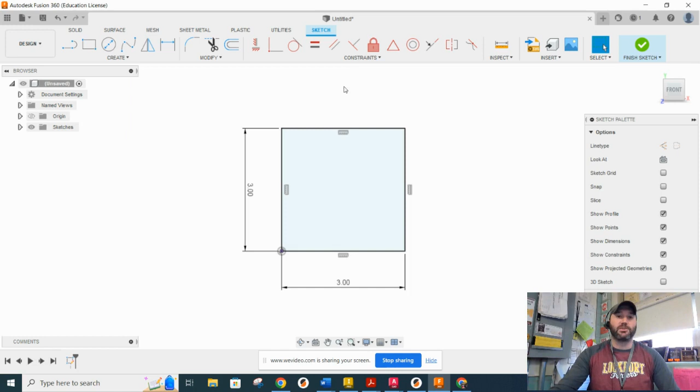I'm now going to use offset. We can see chain selection is on. I'm going to pull this down the thickness of our plywood, which is going to be 3/16 or 0.1875. Okay, we're good to go.

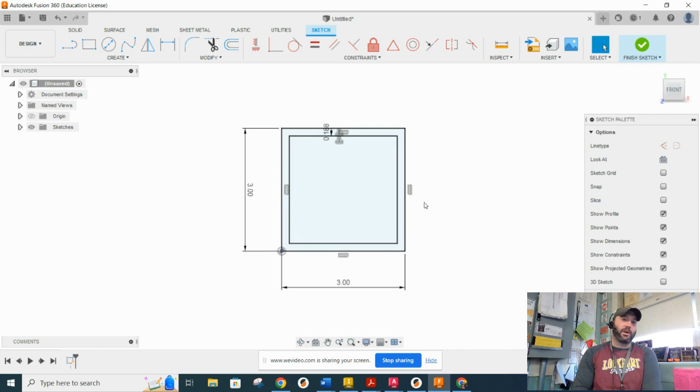Now we have to start figuring out our finger joints. These are simply wooden tabs. I'm going to say I'm going to have tabs here on each corner, and then I'm going to have tabs in the center. So if you think about it, we're going to have to divide this up into 5 different pieces in order to get those sections so I can extrude them.

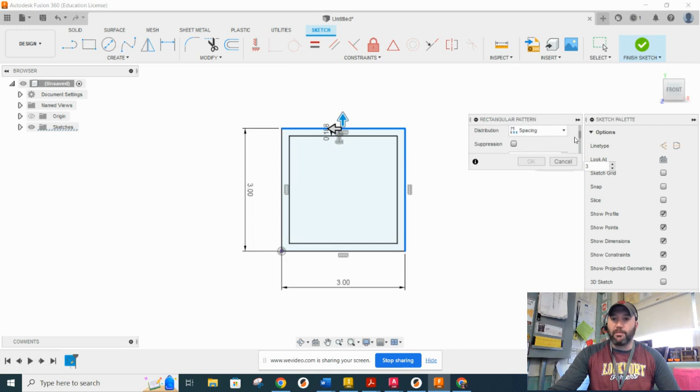I'm going to go to create, use rectangular pattern, and pick on my top line. Let's go ahead and do our directions first, and make sure that my distribution is set at spacing. I'm going to pull this down and say I want there to be 5 of these. If we took 3 inches divided by 5, that's going to be 0.6 each, and we can see that that has now been divided into 5 equal pieces. I'm going to say OK.

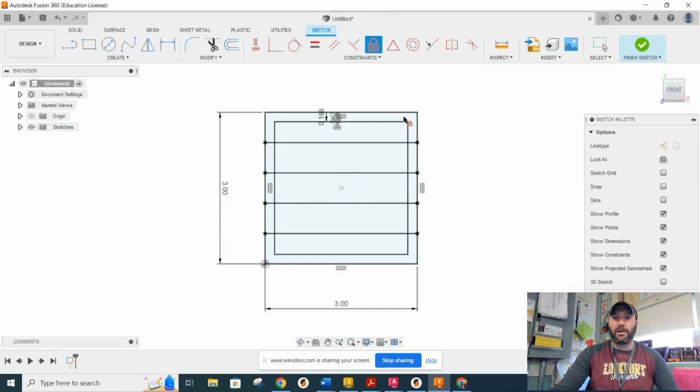Now I'm going to do the cheater method to go vertical with these as well. I'm going to go to point, and track this into place. I'm going to find that dead center, and then fix that point into position just like so.

I'm wanting to use these 4 lines right here. What I'm going to do is use circular pattern to grab those 4 lines, then select on my center point, and say that my quantity is going to be 4. Now we can see we have those vertical lines going up.

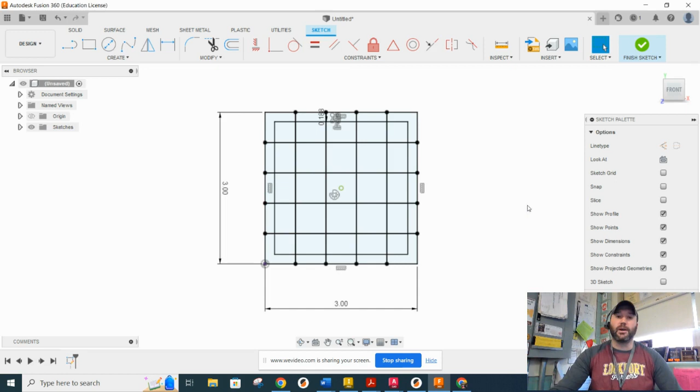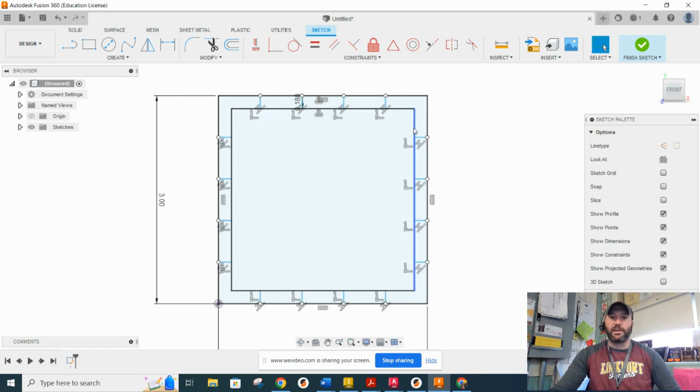We have to do a little bit of trimming here because this profile is going to get very complex if we're going to extrude it. So I'm going to use trim, and a really cool thing with trim, if you haven't figured this out, is you can just drag that cursor holding down the key, and we can clean that up. The inside we don't want, so I'll just delete that. Finally, I'm going to finish the sketch.

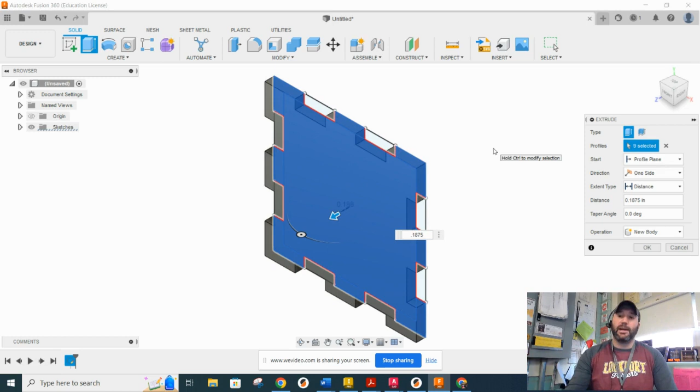Look at this in a home view, and now we can start doing our extrusions. Like I said, we're going to have the tabs here on the corners, and tabs here in the center. I'm going to pick the very center of this and pull this forward, and this is going to be 0.1875 for a thickness. But the thing we have to remember is that we need to create a new component from this. So I'm going to say okay.

All right, so let's go ahead and give this component a name. This is going to be our front, so I'm just going to type in front. Our front also needs to be grounded.

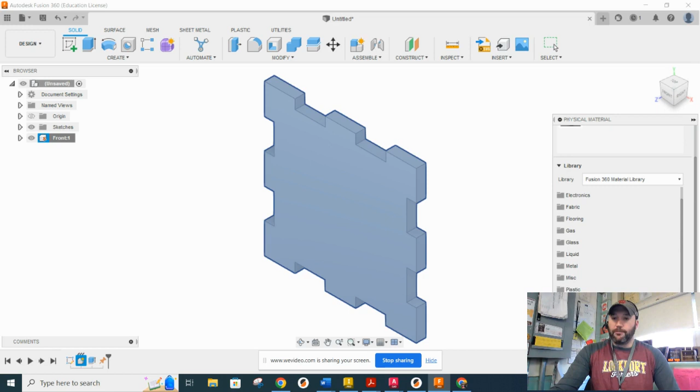So just through a right click, we can come up and ground it. And now our front actually needs a physical material. When the physical material dialog comes up, we're going to come down here and go into our wood, and once we go into wood, we should be able to come down and find some finished plywood, and we can apply that to the top of it. All right, so our finished plywood doesn't actually look like finished plywood, so let's right click on it and let's come up here and let's go to appearance.

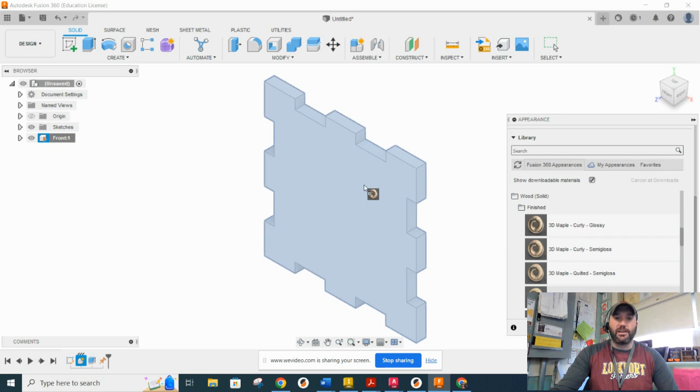And now I'm going to come down and find something nice here. Go into wood solid, and I'm going to come into finished, and then I can see I have some really nice stuff to use. So I'm going to say that this is going to be our 3D maple curly. We're going to go with semi-gloss on this, drag and drop it in. All right, and now it is looking good. All right, so we're off to a good start.

All right, so we have our front done. That thing is anchored down with the ground. Now we can go ahead and start on our right side. So what I'm going to do is create a sketch right here on this face.

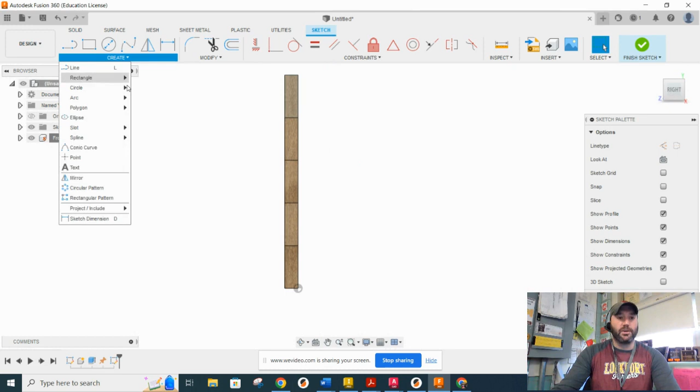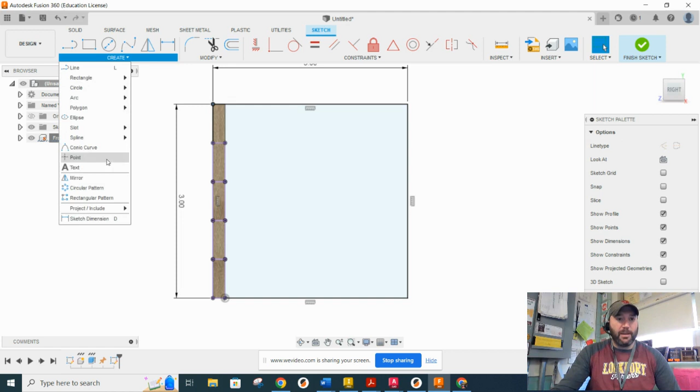I'm now going to come out and use project, and I'm going to come to each of these tabs at the exact center, and I'm going to go ahead and project those through. All right, I'm now going to create a square that's going to have dimensions that are 3 by 3. And now what I'm going to do is actually create a point once again, and I'm going to use the same trick I used the first time.

All right, I need to make sure it's fixed. All right, and now what I'm going to do is just come here using a selection window to grab all that geometry. I can now come up here, go to create. I found out it's kind of easier actually just to go to circular pattern first and then grab the geometry.

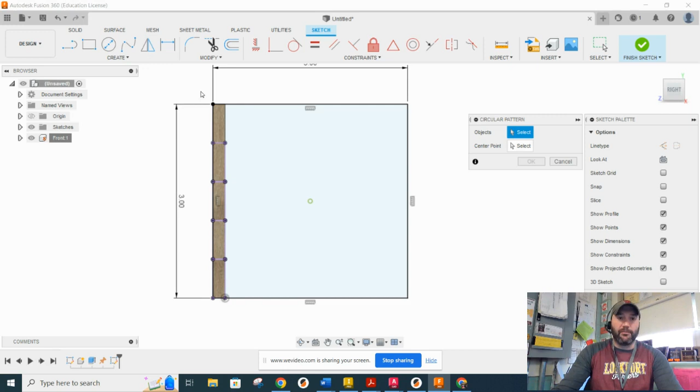There we go. And now I'm going to say select the point. Okay, and now obviously I'm wanting for there to be four of these. All right, so it's going to swing that around so we have all that geometry in place. You might want to go ahead and just turn this a little bit to see what it is we need. Okay, I'm going to go ahead and finish up with the sketch and now go into extrude.

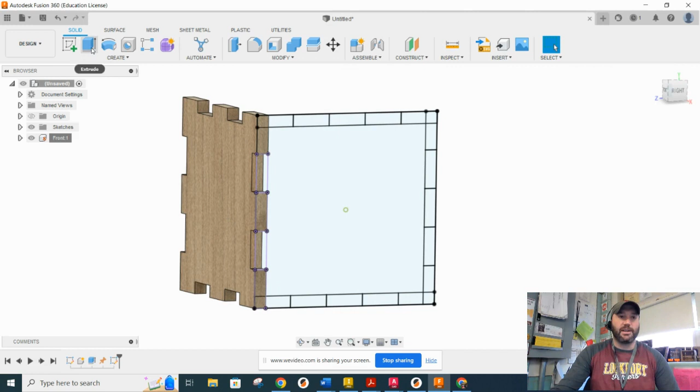So I want this tab and this tab, so obviously I want the same for the other side. I also want this tab, this tab, this tab, and this tab. All right, and then obviously I want the center tabs here. Okay, and then now we can go ahead and pick the center.

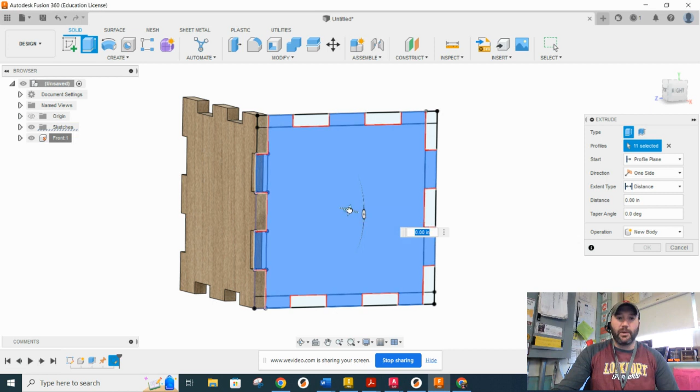All right, and now we can go ahead and send that in. So that needs to go in negative 0.1875. It's not going to be a cutting operation or a join operation. This is once again going to be a new component. And now I can go ahead and say okay.

All right, so we can see that that is in there. Let's go ahead and give our name for our component, and that's going to be right. Okay, and since this is a component, now we can come up and use as-built joint to pick that right side and that front. And if you need to preview the motion to make sure there's a connection, then do it. Let's go ahead and say okay on that.

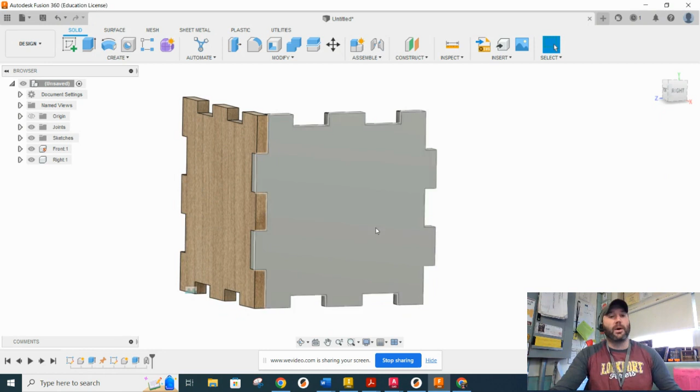All right, so now let's go ahead and right click on this. Let's come up, go into physical material. Since this is a top down, we're going to see that that finished plywood is already in this design, so we can go ahead and drag and drop that on. And then obviously this is going to need the appearance that we're wanting it, so let's go to appearance and let's go ahead and drag and drop that on. And now we can go ahead and close.

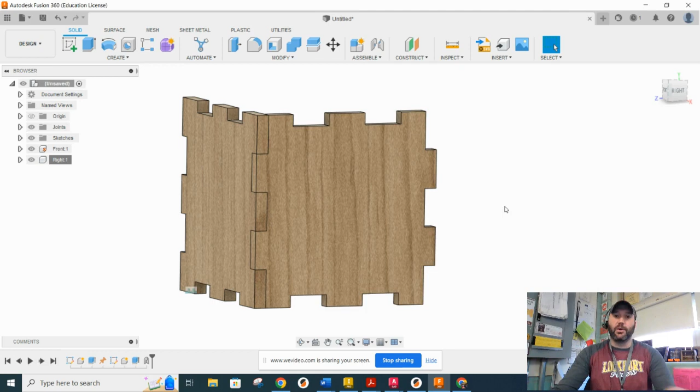So we grab a hold of this. Okay, we're looking pretty good. All right, so if a lot of you are getting frustrated at this point, thinking we're going to be doing this every time, there's a couple tricks that are built into this.

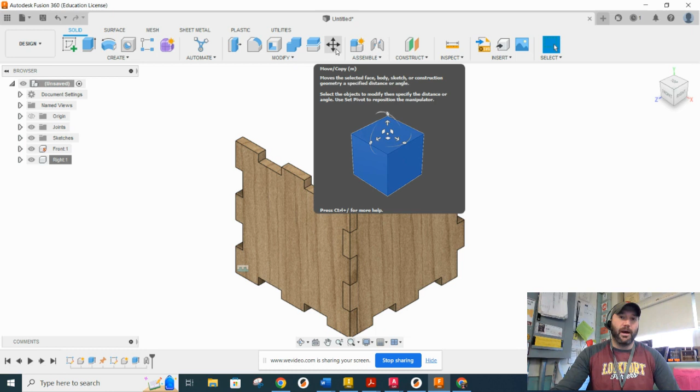So check this out. Instead of rebuilding that left side the same way we did the right side, we can come up here and find our move copy feature. We'll make sure our move object is a body, and I'm going to come right here to the dead center of this face.

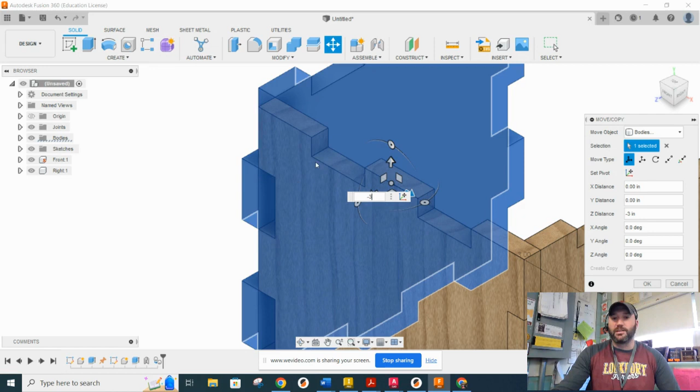I need to pick on create copy first, and now I'm going to drag with my arrow over and say that needs to go over a distance of 3. Once we send that over to the distance of 3, we can see this is actually not in the right spot, so I'm going to add the thickness of my material. It's going to slide it right into place, and I'm going to say okay.

So what we have to remember is this is not a component yet, because when we did the move and copy, that actually did it as a body. So up here underneath the body folder, we can right click on this body and say, go ahead and create a component from that body. Obviously this is going to need a name, so I'm going to type in left.

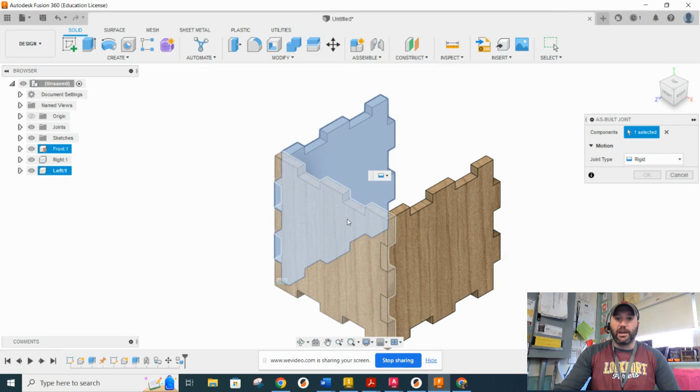Now, since this is a component, we can use an as-built joint and connect those two together, and we can take a look at that to make sure there's that connection.

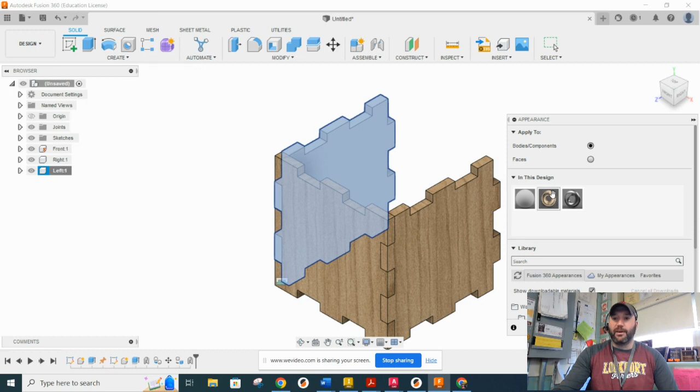So our left side is also going to need physical material. I'm going to go ahead and just drag on that finished plywood. Now I'm going to right click on it and go into appearance, find that maple, and go ahead and drag it and drop it right on top of it. So once again, everything is stationary, it's good to go, fully constrained.

If you're guessing that we're gonna do the same for our back that we did with our front, exactly. So let's go out there and use our move copy.

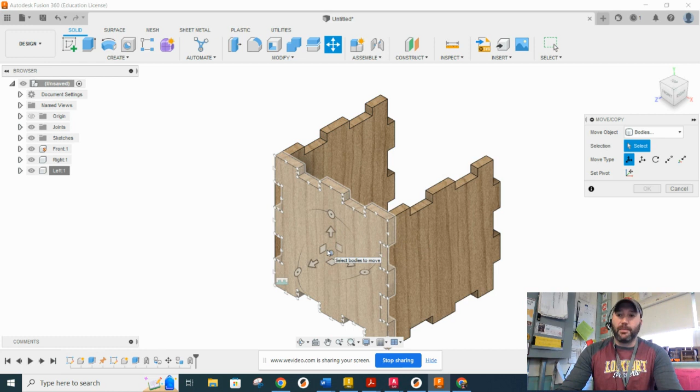Once again, our move object is going to be a body. I'm going to come right here to the dead center and pick on it, making sure you pick on create copy. Now we can go ahead and slide that back into position, so that's going to go back 3. I'm going to be adding my thickness, my material, which is 0.1875, and I'll say okay.

Once again, we have to remember that's a body now, so we have to right click, create the components from the body, and now we can give it a name. In our case, that's going to be back.

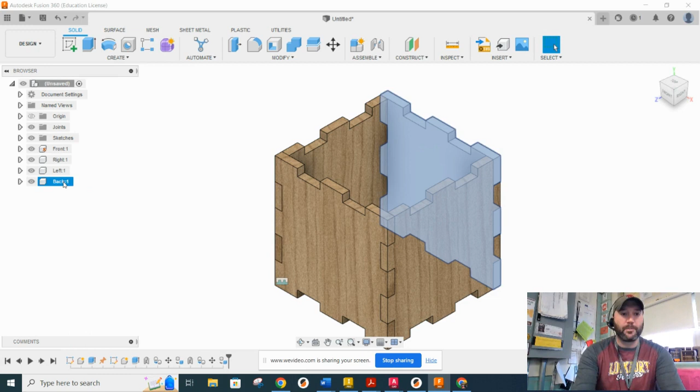Since it's a component, we can do an as-built joint. So we can take our back and our left side, make a connection on those, and that is set. So now let's right click and go up into our physical material.

Let's go ahead and drag and drop on that finished plywood, and then let's also right click on this and go into our appearance and drag in our maple. So we're looking pretty good, we're almost done with the box.

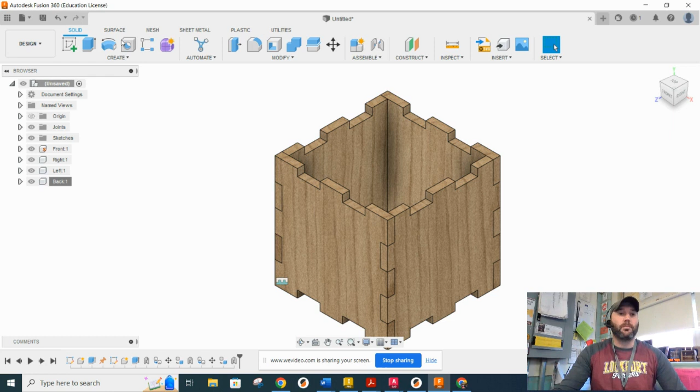So now what we're going to do is create the top portion of this. I'm going to go ahead and create a sketch, and I'm just going to pick right here on the top surface. Now what I'm going to be doing is probably turning this a little bit where I can see where those tabs are going to be going.

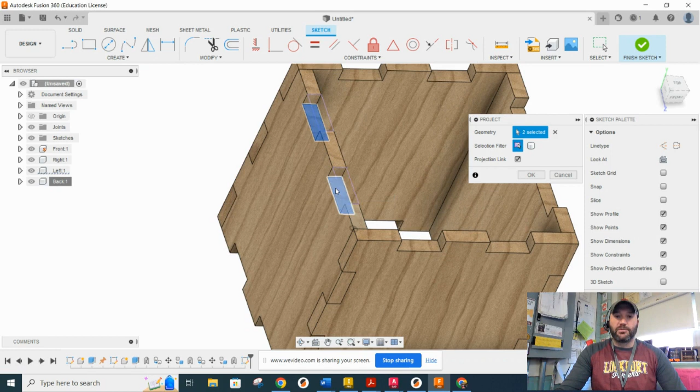Now I can come up, go to create, go into project, and now I can come around to each of those faces and pick on them to make sure all that geometry is being pulled forward where we want those tabs.

Now we can go ahead and say okay, I'm going to look at this in the top view. The last thing I'm going to do is come out and create a square that goes from this intersection to this intersection. And if those intersections are not popping up, of course you've got project, you can pull that forward and then draw the square off of that.

All right, so we're looking pretty good here. Let's go ahead and finish the sketch.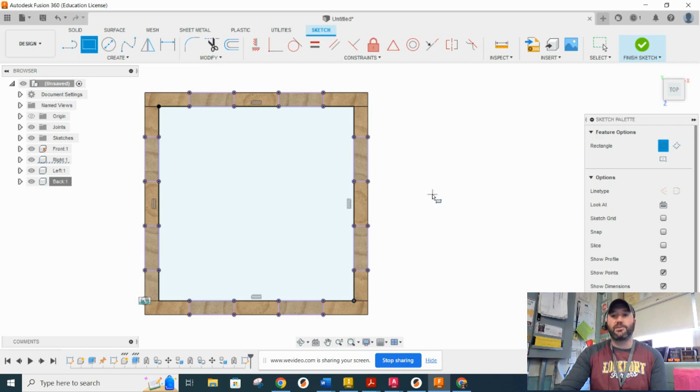Look at this in a home view. All right, let's go ahead and begin doing our extrusions.

So that tab, both of those tabs, and those tabs, and then we have this one right here in the middle, and we're obviously going to be extruding that down. Operation is going to be a new component, and the thickness needs to be 0.1875. All right, we're putting that right exactly where it needs to be.

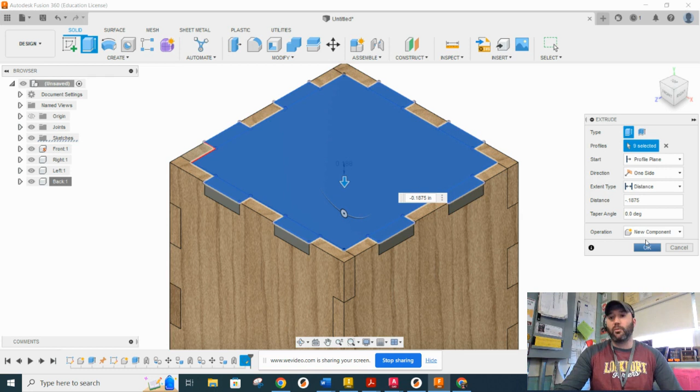All right, so that is a component. Let's go ahead and rename that. That's going to be top.

Okay, once again, we have to make sure we have an as-built joint, and let's just go ahead and connect the top to the right side. Make sure we have that rigid connection. All right, and we can say okay.

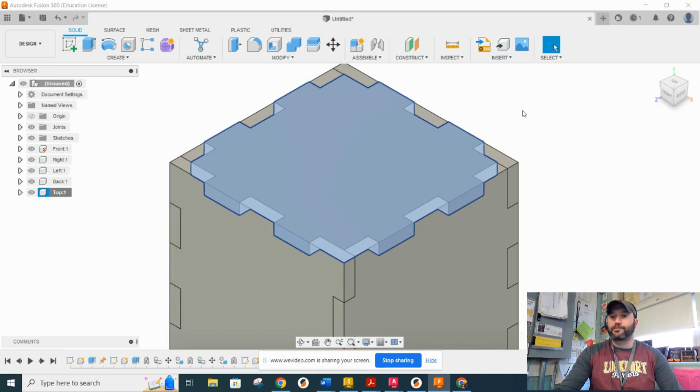So our top is going to need some physical material. Once again, we're going to go ahead and drag on our finished plywood. All right, and now our top is going to be needing an appearance. So let's go ahead and drag on that maple. Okay, we got it. Now we can go ahead and say okay.

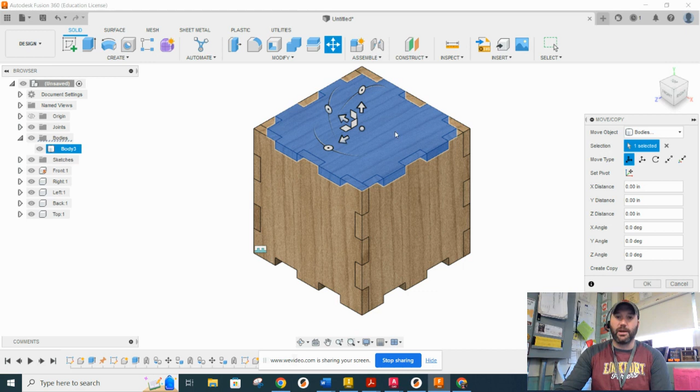All right, so we're missing one last thing. That's going to be the bottom. So all we have to do is go to move copy, make sure our move object is going to be a body. Okay, we're going to come here to the dead center. We're going to pick on it, make sure we're switching this over to create copy. And now we can drag this down, and this needs to go down a distance of 3.

And now we're going to go ahead and add the thickness of our material, which is 0.1875. And now we're going to say okay.

We have to remember that what we just did is now a body, so we're going to have to right click on it, create a component from the body. Let's go ahead and name that component. In this case, it's going to be bottom.

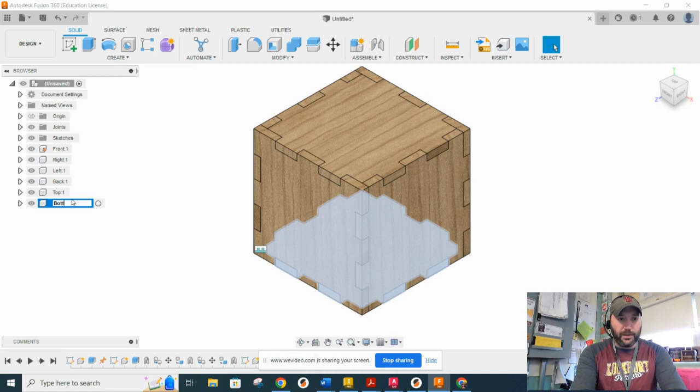Okay, and now we can go ahead and do our as-built joint. Orbiting this over, we can pick our bottom, we can pick our right side. Let's do that again. As-built joint, there's our bottom. Okay, there is the right side, and let's go ahead, make sure we have a rigid connection, and let's say okay.

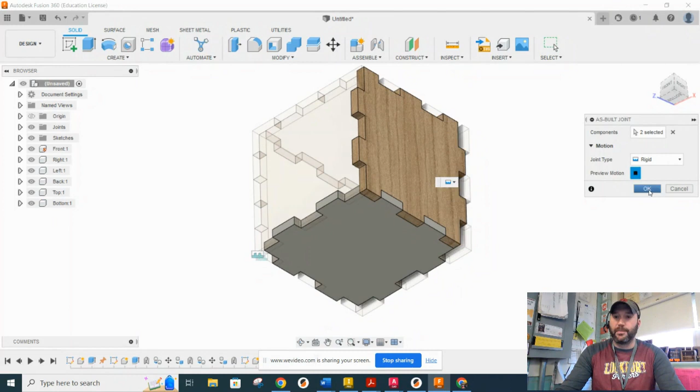And now we can right click on this, come up into our physical material, make sure to drag on that finished plywood. And once again, let's go ahead and right click on that and put in our appearance, which is going to be that maple.

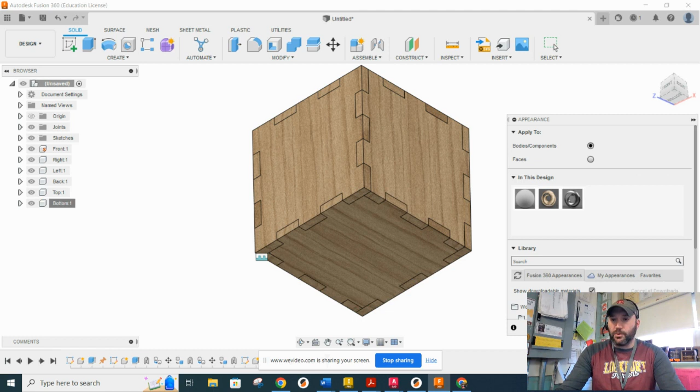All right, so we're looking good. All right, so we have ourselves a completed box.

Just to make sure everything is going to be working well for us, okay, what we can do is always come up to inspect. We can go to interference. We can select the entire assembly. Everything is selected, and now we can go ahead and do a compute. And we can see that there are no interferences detected, which means all of our finger joints are working well.

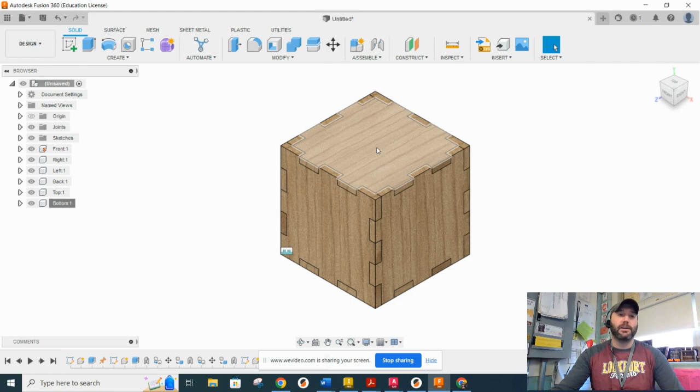All right, and if I were having my kids actually create this, the front, the back, the sides, the bottom would all be glued with some sort of a wood glue, and then I would be obviously leaving that top unglued, so they could simply open that up. But they're going to need some sort of a handle probably, just to get their finger in there to actually be able to pry that up.

So I can come out, create a sketch, create a circle. We can go ahead and drag this into place. And I don't know, I think that diameter 0.75 would probably work pretty well.

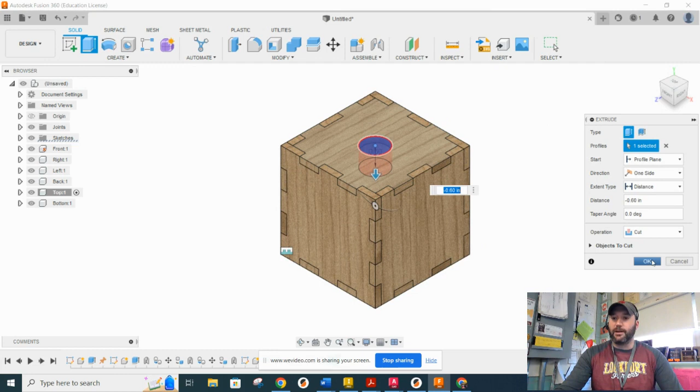And now we can simply just come in here. We can do an extrude. Okay, we can cut that down. All right, that's going to be a cut. We're going to say okay to that.

All right, so that's how you can quickly go out there and create, just in this case, just going to be a 3-inch wooden box with finger joints.

You have to remember now is that since we were using the whole body component sort of thing, if you did engravings on the front, they're not going to be showing up on the back. Okay, that's the whole benefit of using bodies to kind of get that stuff that you need. So it's not going to be trickling over into the other part.

All right, so there's a lot of great things there. I hope you enjoy that. All right, have fun with it.